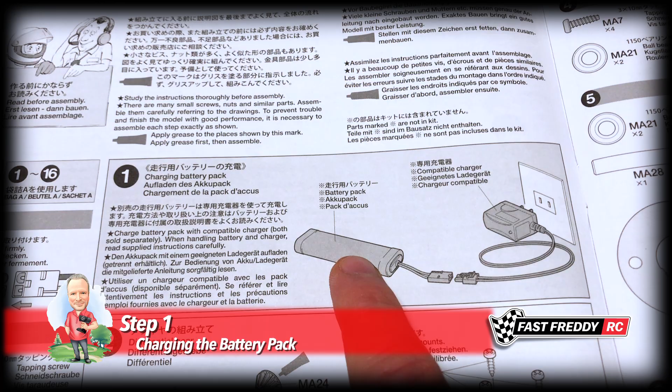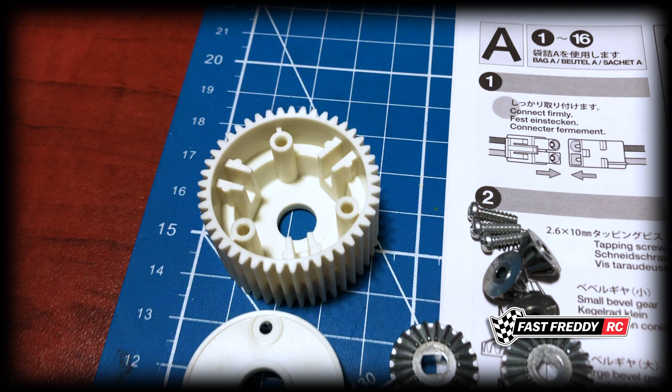So we're going to move right into step 2, which is the differential gear. You can see that we need to put this all together. So there are all of the pieces that we need for this step. And of course, there's our differential slash spur gear setup, and then the piece that closes this all up. So I'll set this up and we'll put the differential gear together.

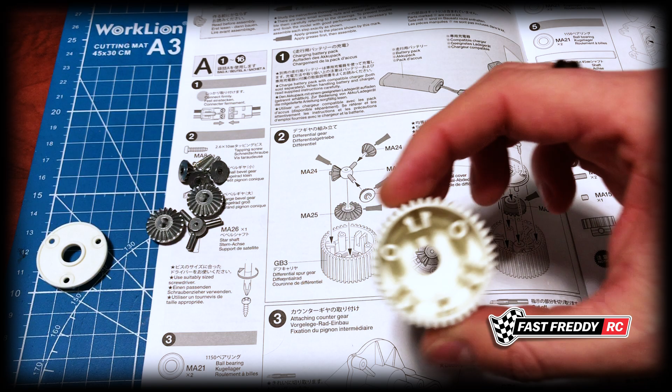So as you can see, we're going to grab our differential spur gear, and you can see that the piece that they want you to use is one of the large bevel gears, and they're showing you greasing it up. Now you can also see that there is a dark grayed area at the bottom, which tends to mean they're wanting you to grease that outside ring that's down there.

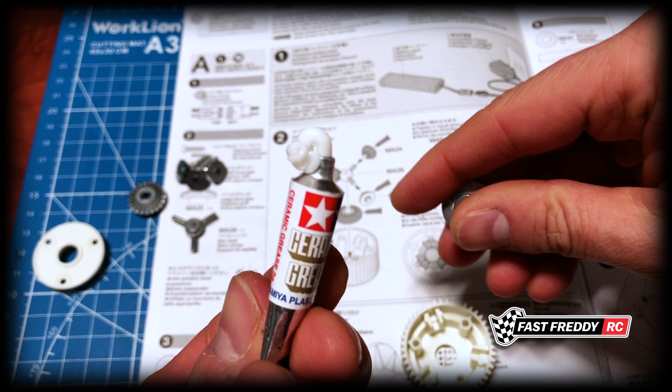So what I'm going to do is I popped the top here on the grease that came in the kit, and of course often it'll just pop and all the stuff comes out. So I'm just going to use some of this on the top of here for now, and then I'm going to use some of this on the bottom so that we know that's all greased up. And I always figure with this stuff, don't go overboard, but put enough grease on it.

Now with this, I'm just going to drop it right in place just like that, and then I'm going to make sure that the other areas are greased up as well. And there's enough on there just because obviously we're using what kind of popped out of there.

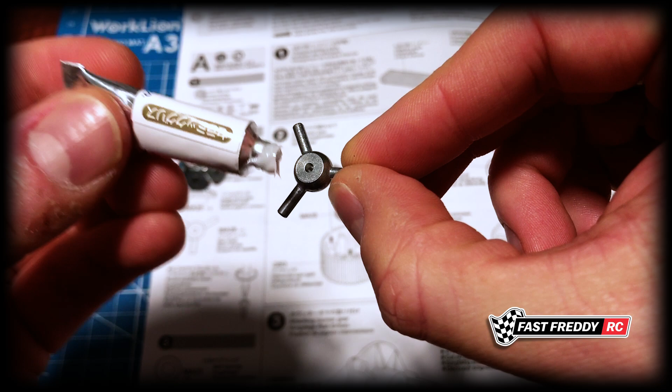Now you can see with the star, they're showing that they want the metal parts greased. So I'm just going to squeeze this out just a bit, making sure that the star gets covered. Now before I switch to holding the other side, I'm going to slide that on, and slide that one on. Then I have these two that I can hold so I can grease up this last one.

There we go, and we'll put that last gear in there. Now what I find is the easiest thing to do in terms of greasing it all is just put this in. So you can see that there are marks here that this needs to slide into so that the shafts will fit in there just like that.

And then what I like to do is just use this whole setup to grease the gears. So you're making sure you're getting enough on that one, and enough on this one. I'm not squeezing much grease out of this because I'm also moving it around, just making sure that everything is covered, so every part of the gear has grease on it.

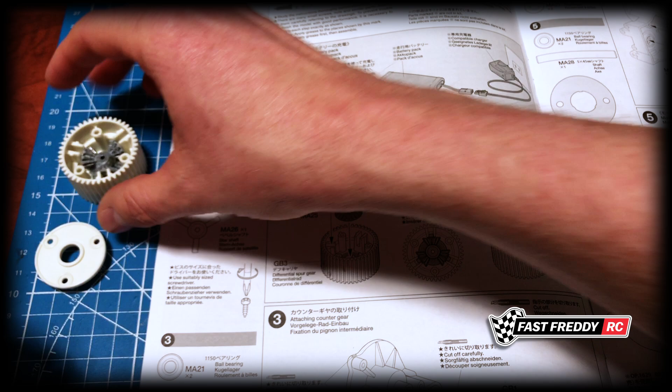So that'll be good. With this one, technically maybe you don't have to put some on because those gears will naturally grease it up as well. But I'm going to put a little bit on here, just like that - not too much, but enough. And then we're going to slap that right on top, just like that. You can see that that's more or less what it's going to look like.

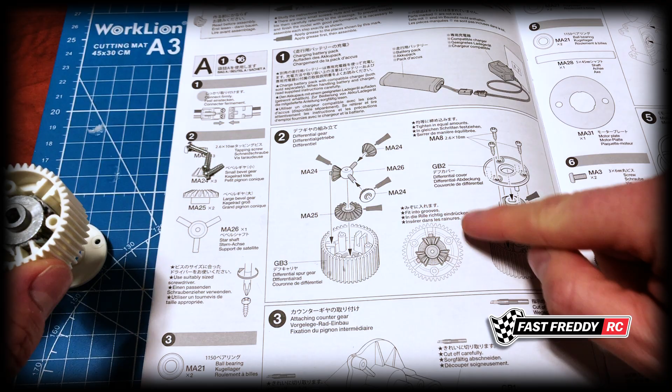And then we've got to grease up the top of this, just like that. So we got enough on top of there. And you can see the 3 holes - you'd think, oh, that's where these 3 pronged pieces go, but that's not the case. It goes over the top of where you slid the star shaft into, because these holes are for the screws. So we're going to make sure that sits like that.

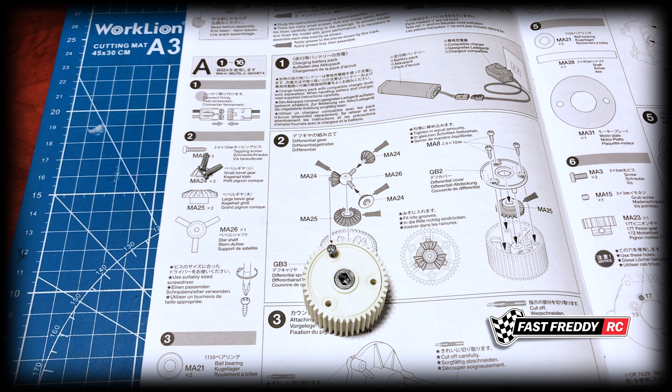And now the holes will line up for the screws. So what we're going to do is we're going to grab one of our screws here, and we'll grab our small screwdriver, and I'm just going to make sure that that's going in okay.

Now what I like to do is make sure that all 3 screws are going in correctly before I tighten everything down. Because what you don't want is to tighten one all the way down and then maybe the plastic isn't quite aligned to the hole that you want, and then you're having to backtrack and undo everything just to tighten everything down.

Now this feels pretty good, so I'm going to screw these all the way in. I'm kind of going around like a car tire, making sure that they're all seated properly before I screw any single screw in place. Now once it's done - you can see here it says tighten in equal amounts. Well, that makes sense, but because they're tapping screws, as soon as I get to the end and it feels like you're at the end and you don't need to go any farther, I'll stop.

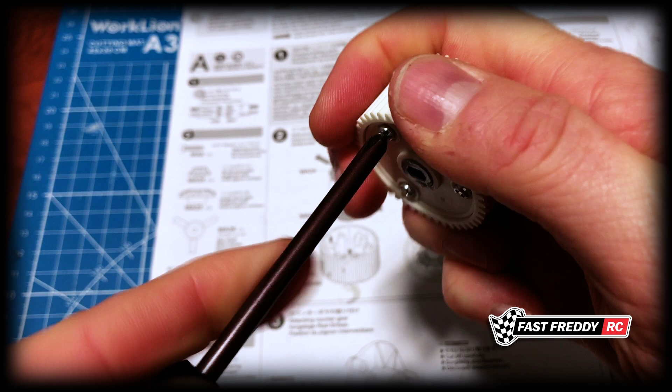So that feels pretty good. I'm just going around making sure that it's still nice and tight and nothing's loose. But there we go - there is our differential put together.

Now, before we move on to the next step, there is one thing I would suggest that you do, and that's go back into bag A, and you're going to grab our axle pieces right here. The reason I would do that is you want to make sure that everything that you've put together inside of here is working correctly.

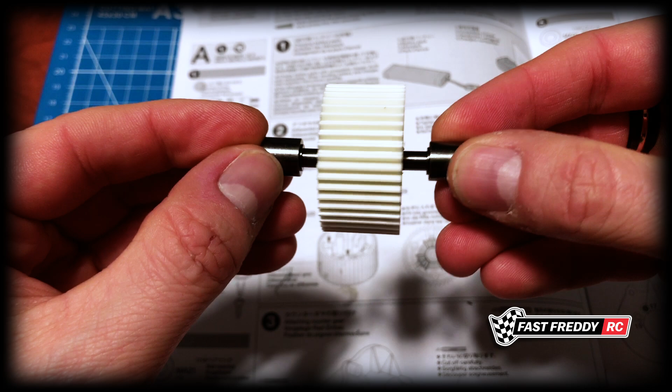Now, obviously with them both in, I can go forward and back, everything's fine. But to test the differential, you want to be able to hold one side and spin. And this is actually running really, really smooth. I can go back and forth and everything sounds right if you listen.

So I know that the differential is in there correctly, nothing is binding, everything's fine, because the last thing you'd want is if something was binding inside of here, or it wasn't quite built right, and then you go ahead and do all the future steps of putting this into the gearbox and it doesn't work - you'll have to take everything apart again. So I would just do that final test. But this is okay, everything's working fine, so step 2 is complete.

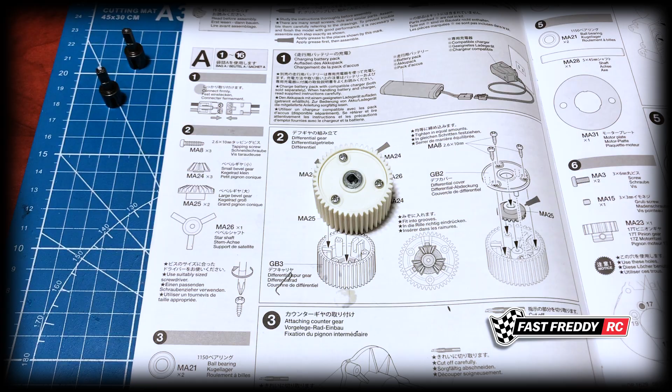So now we're going to move on to step 3 and attach the counter gear.